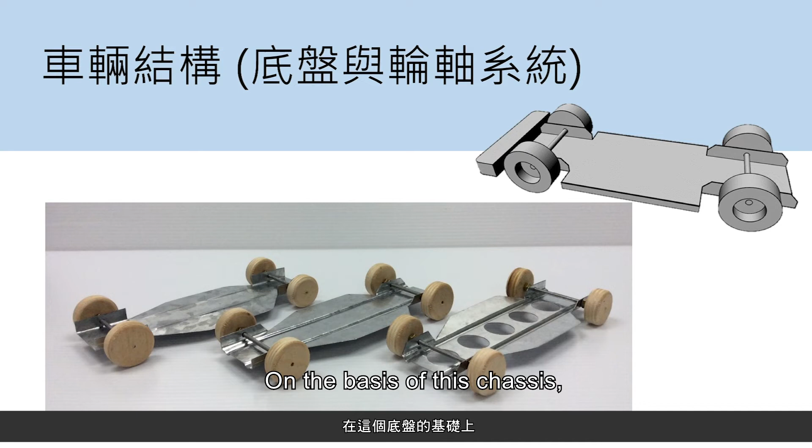Vehicle structure, chassis and axle system. In this unit, students will first design and build a vehicle chassis for an experimental test. On the basis of this chassis, we can continue to develop the shape of the car body and improve our high-pressure air-speed car in terms of performance refinement. All optimization experiments can achieve our engineering design optimization goal through the modification and advancement of the chassis system.

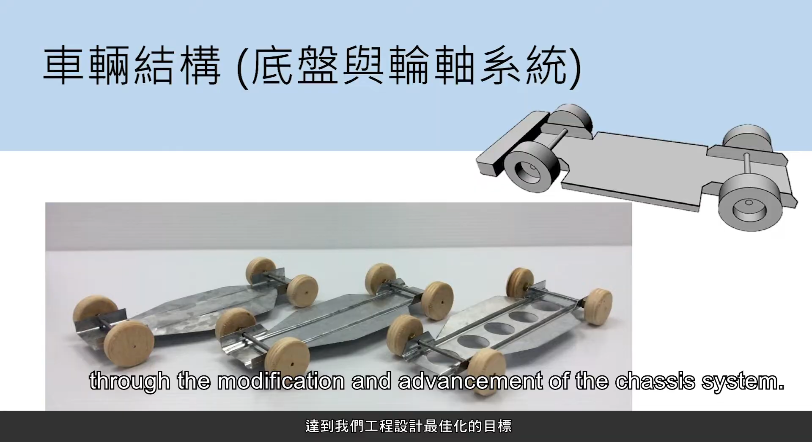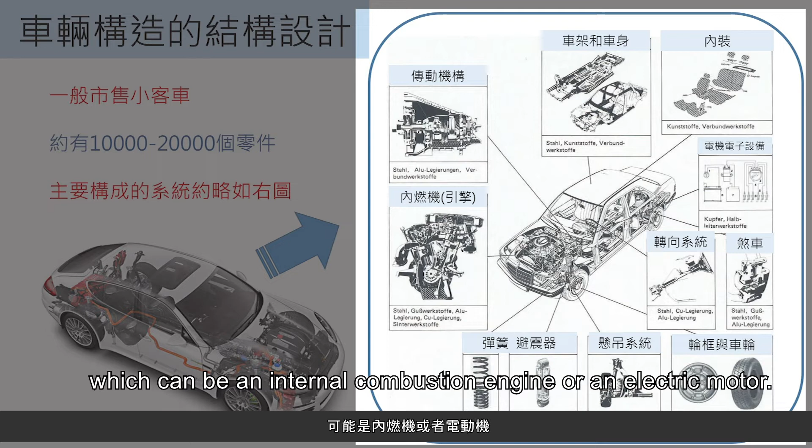The car is a very complex machine. It includes many systems, such as the transmission mechanism, the frame and body, the interior, the steering, the brakes, the wheels, the suspension, the spring, and shock absorbers, as well as the power system, which can be an internal combustion engine or an electric motor. There are many parts combined in these systems, so there are about 10,000 to 20,000 parts in a regular passenger car. For the assembly of these parts, the structural design must be very strong.

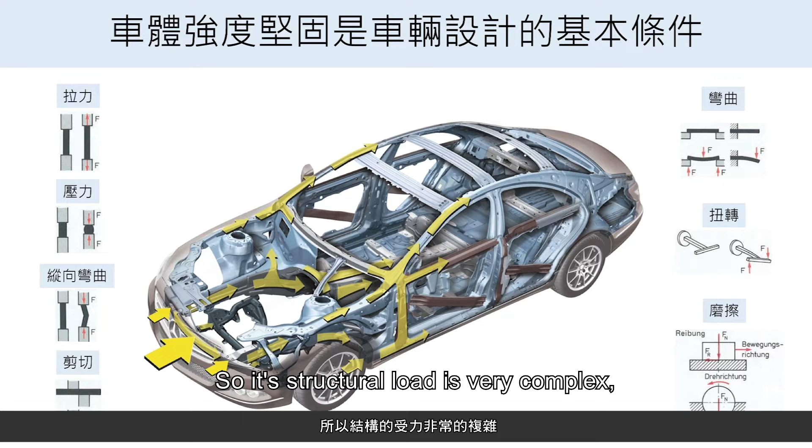So that each system can work properly, it is a basic requirement of vehicle design. The sturdiness and safety of the car body's structural strength is a basic requirement for vehicle design. Due to its structural complexity and the severity and changeability of the driving conditions, its structural load is very complex, which includes pulling force, compression force, longitudinal bending, shear force, bending force, torsion, and friction between parts. These forces make the structure of the car body a complex and huge project.

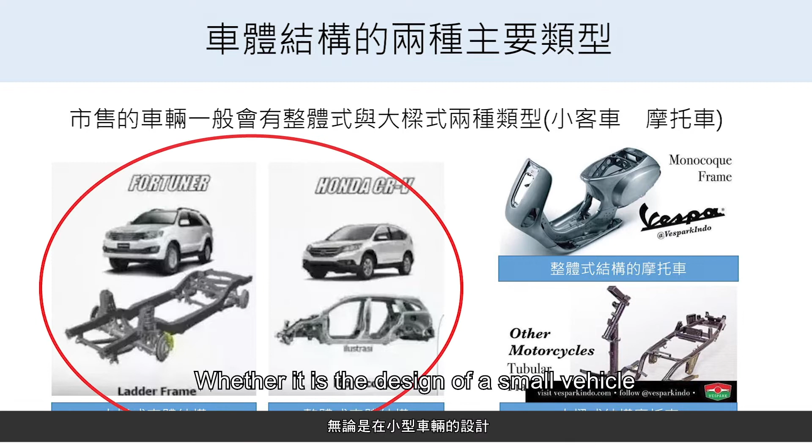There are two main types of body structures. One is the ladder frame type, and the other is the monocoque frame structure. Whether it is the design of a small vehicle or a motorcycle, these are the two main types of structure. Generally speaking, the monocoque frame design has the following three main advantages. 1. Larger passenger space. 2. A more comfortable ride due to shock absorption. And 3. A more comprehensive protection for passengers. Therefore, presently most cars that are sold use the monocoque frame as the main structural design method.

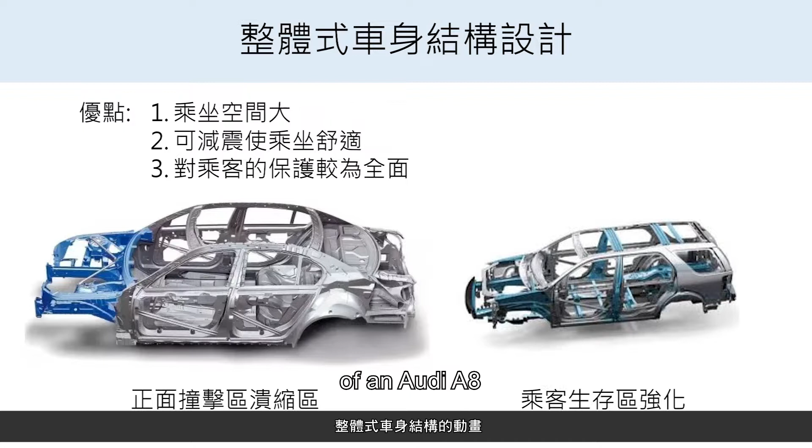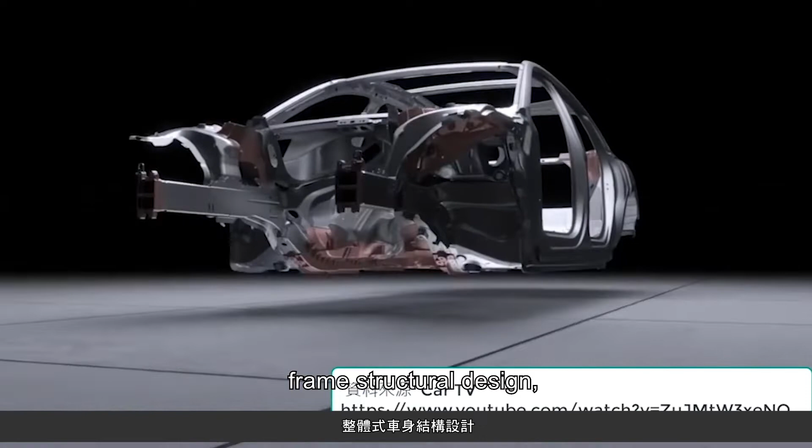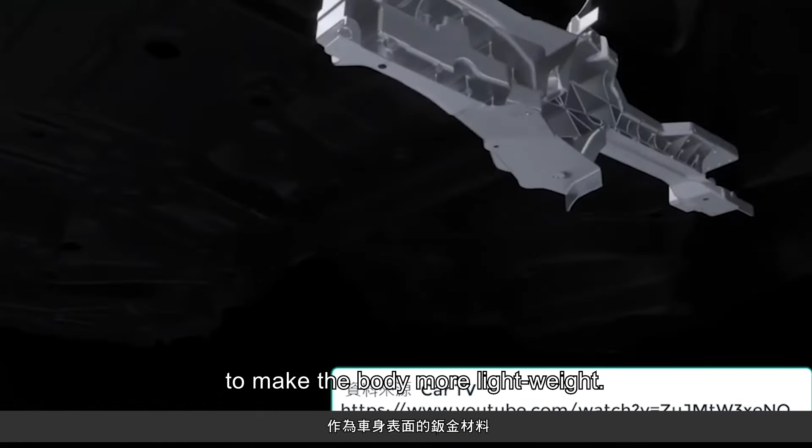Let's have a look at the animation of the monocoque frame of an Audi A8 to understand the design of the monocoque frame body structure. The monocoque frame body structure is composed of many steel plates or casting parts. The Audi A8 design that we see here is a very original monocoque frame structural design, which includes the aluminum alloy parts shown in red, high-strength steel plates, and aluminum material used as sheet metal for the car body surface to make the body more light-weighted. These aluminum connecting joint parts are designed with many ribs to increase the structural strength while also decreasing its weight.

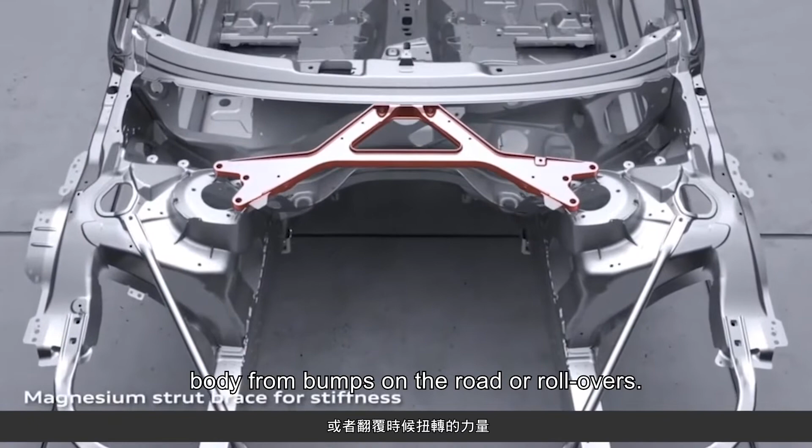The parts of the body structure that require strength are forged from high-strength steel, which can withstand forces such as front impact collisions, and torsion suffered by the vehicle body from bumps on the road or rollovers. When the vehicle is subjected to a side impact, the overall frame is used as a force dispersion structure, which is the strength advantage of the monocoque frame body structure. It can protect the safety of its occupants in the passenger's area to the maximum extent.

These complex and diverse materials and structural designs are a complete protection mechanism for the body structure, making the vehicle structure safer and the passenger space more comfortable. This is the biggest advantage of the monocoque frame design.

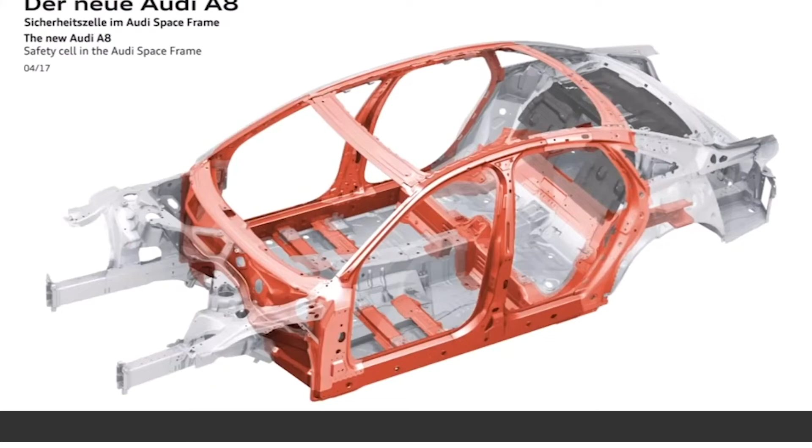The car ladder frame body structure design mainly has the following two advantages. 1. Better load capacity, and 2. More flexible design space. Therefore, we can use the same chassis design and make different body structures. Next, we are also going to watch some videos regarding the ladder frame design structure and understand what kind of body structure design it is.

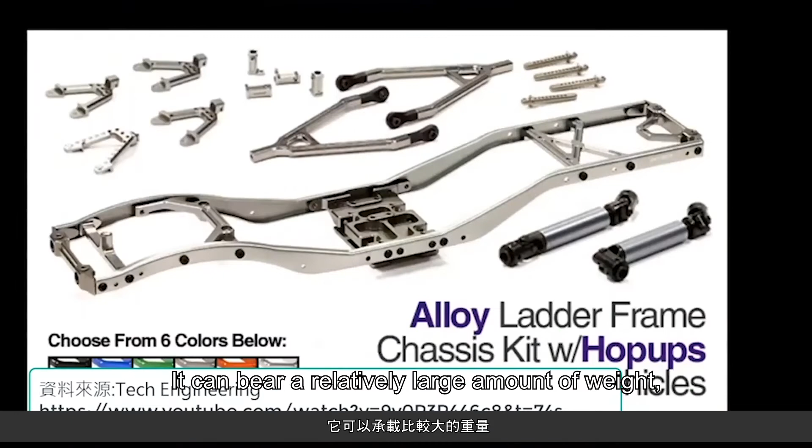What you see now is the ladder frame of the structure. The main structure of the ladder frame is made by the welding of different metal bars. It can bear a relatively large amount of weight, so this type of structural design is generally used in trucks, vans, or off-road vehicles. The design of the car body structure is closely related to the engineering materials used. The ability of diverse design application from the in-depth high school curriculum material is an extension of our learning content.

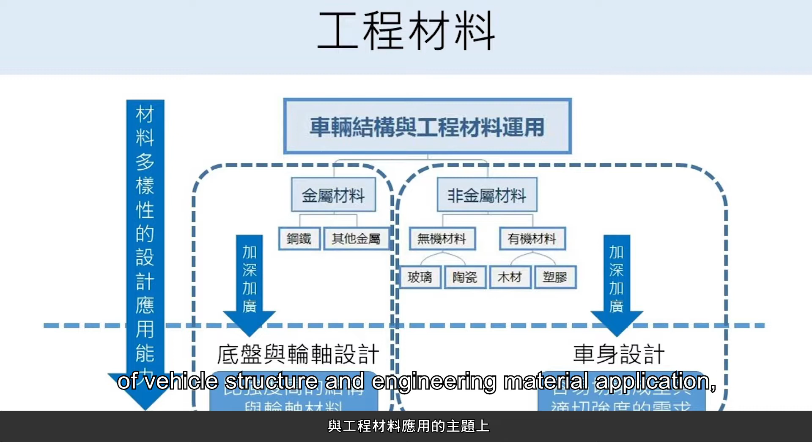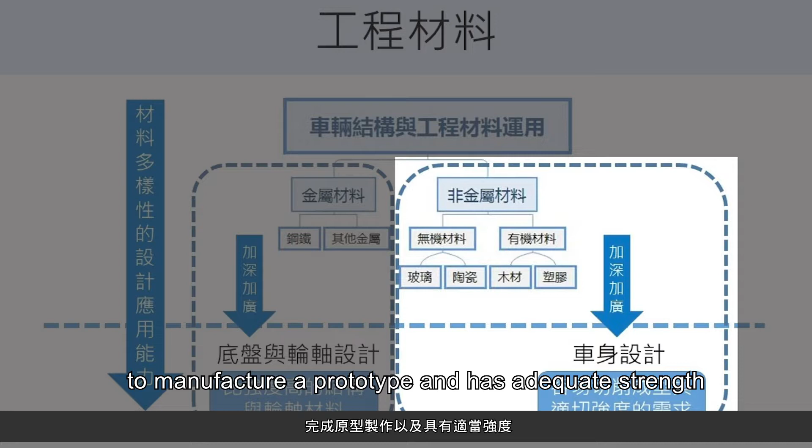Therefore, for the topic of vehicle structure and engineering material application, we use structural design materials with higher strength in the design of our vehicles, chassis, and axle systems. The material processing part includes the application of many types of metals and processing techniques. For body styling, we use materials that are easy to cut and shape to manufacture a prototype and have adequate strength to perform all test conditions. Non-metallic materials, such as wood or foamed plastic, are most likely to be used as material for body styling.

Here is a conceptual knowledge of the application of materials in structural design. Specific strength of a material. The specific strength of a material is the strength of the material divided by its density. Specific strength is a very important concept in the design of traffic and transportation vehicles. Under this concept, we can use materials with higher strength and lighter weight to achieve higher structural strength in terms of the design of means of transportation and better results in terms of energy efficiency.

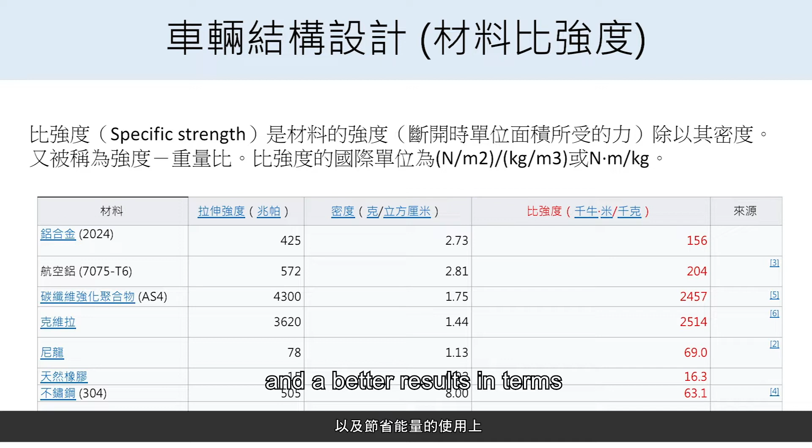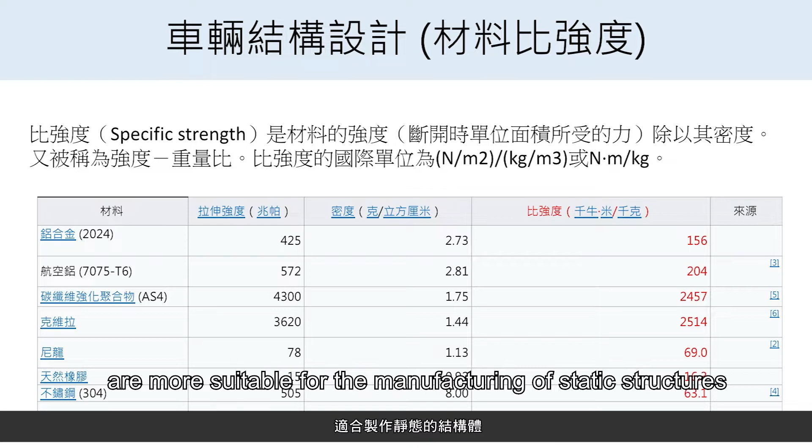In the following table, we can see that some commonly used materials with high specific strength, such as composite materials, are suitable for the manufacture of traffic and transportation vehicles. Materials with a low specific strength, while also having a high structural strength, are more suitable for the manufacturing of static structures, such as civil structures or buildings like houses.

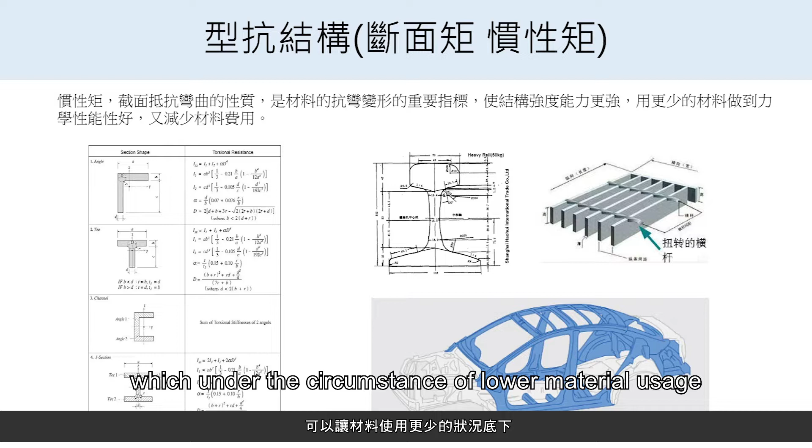In structural design, form-resistant structure is also a very important concept. The form-resistant structure uses the design concept of higher sectional moment and moment of inertia, which under the circumstance of lower material usage can achieve better mechanical and structural characteristics, reduce the use of materials, and improve the strength of the structure.

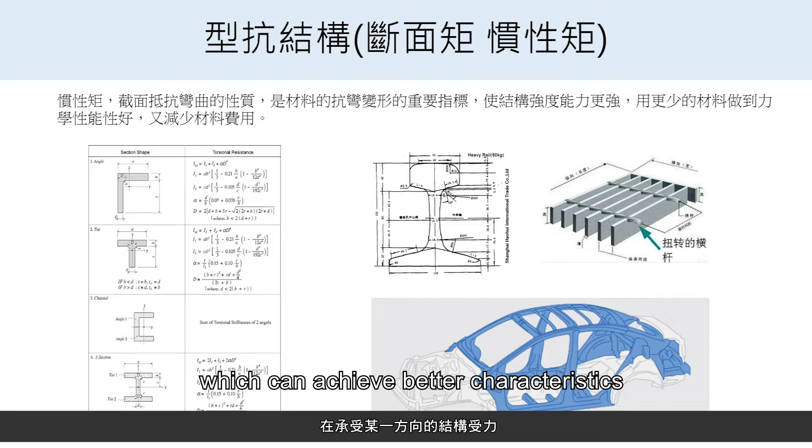For example, in many structures, we will use special rectangular or I-shaped cross-section materials, which can achieve better characteristics when bearing structural forces in a certain direction, or bend the steel plates into many irregular shapes, which can make the whole structure stronger when combined together, which is also one of the reasons why the monocoque frame structure is strong and durable.

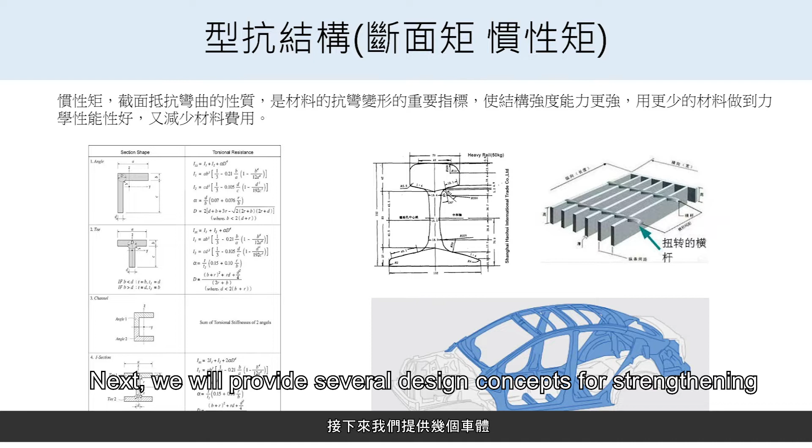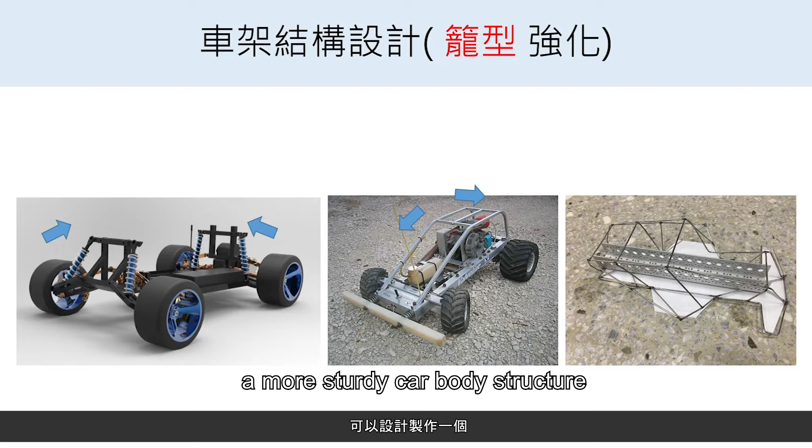Next, we will provide several design concepts for strengthening the structure of the car body and provide you with a reference for the structure design of your compressed air racing car project. The next topic is the design and manufacturing methods for reinforcing the vehicle's body structure. First of all, what we see here is the cage structure reinforcement method. It adds an outer frame welded into the shape of a cage onto the original chassis design to strengthen it. With this method, a more sturdy car body structure can be designed and manufactured.

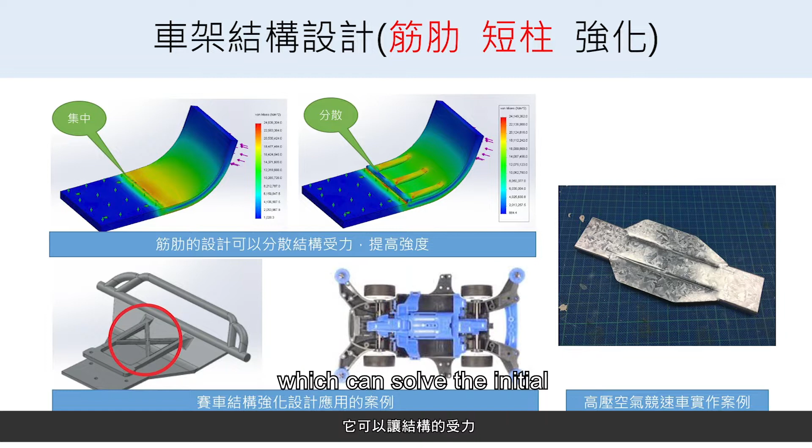The second method can be often seen in many car body structures. For parts of the structure that endure large forces, we design ribs and stubs, which can solve the initial problem of force concentration by dispersing the structural force at the location of the ribs, so the overall strength can be improved. For example, on the bottom right is the chassis design of our compressed air racing car. We roll-pressed 2 ribs in the middle of the chassis, which can reinforce the original strength of the metal sheet to make the structure more sturdy and durable.

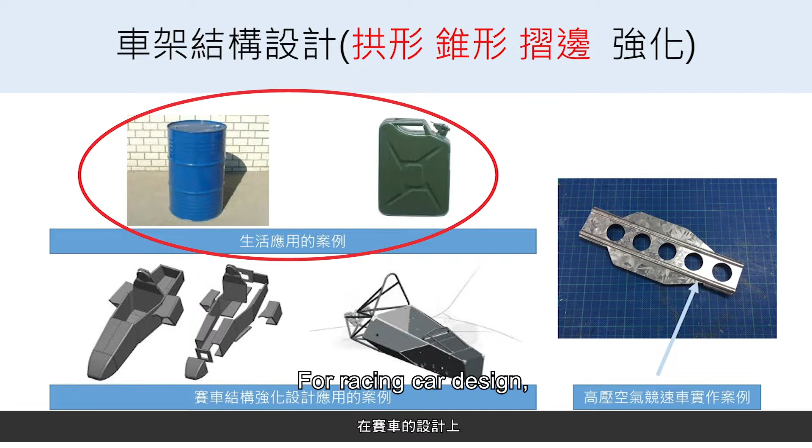The third method of structural design reinforcement is the use of sheet plates, joining them together like jigsaw puzzles to make the whole structure more sturdy. The fourth method of structural reinforcement design of the car body is the use of arched, tapered, or hemmed shapes, which can be often seen in the design of containers, which use bending techniques to increase the container's strength. For racing car design, for example, the use of arch shapes on the front of the F1 racing car can reinforce the passenger area's overall structural strength.

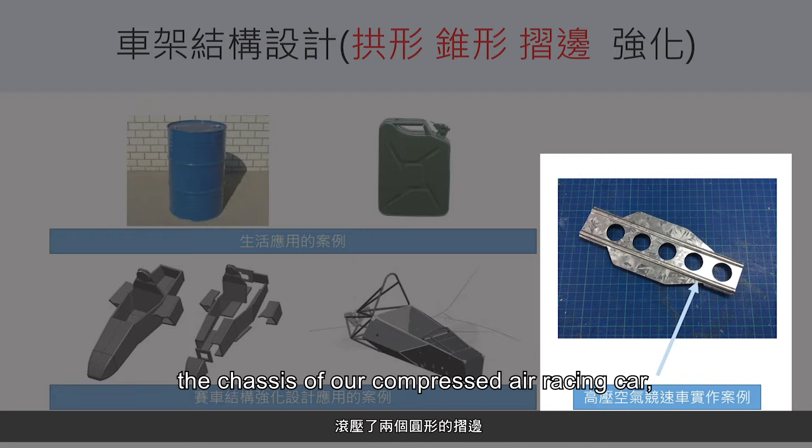Or the use of this kind of hemming to improve the structural strength of the body to keep the racing driver safe in the passenger area. For example, as shown in the lower right figure, two circular folded edges are rolled at the middle of the steel sheets of the chassis of our compressed air racing car. These arc-shaped edges can make the overall structure of the vehicle body more sturdy. Therefore, we can punch some holes in the middle. Not only does it improve its strength, but it also reduces the weight.

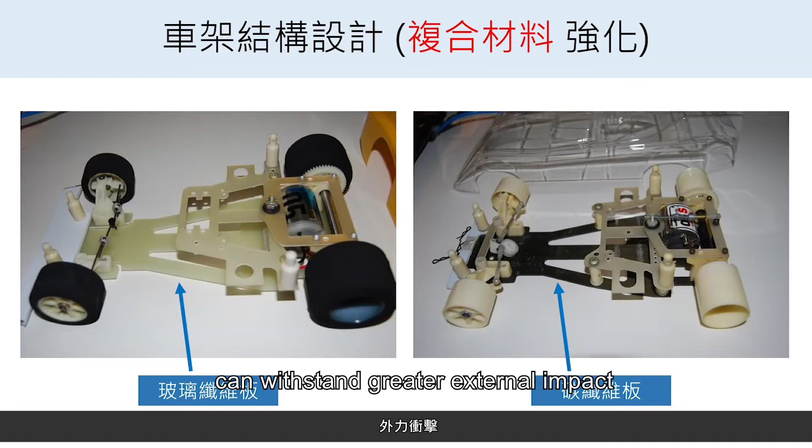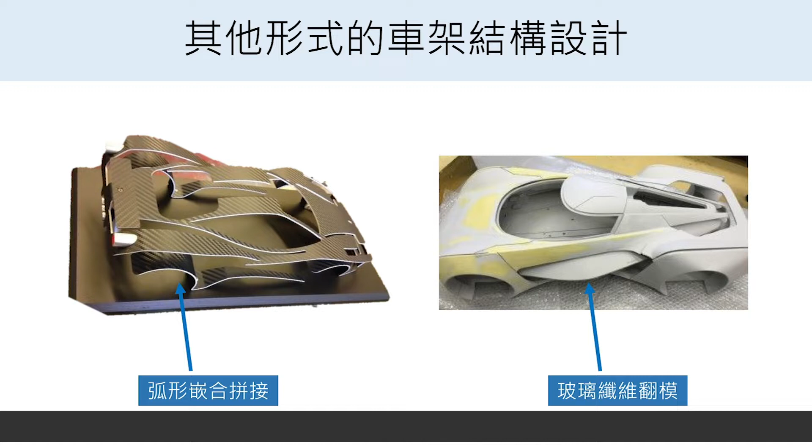The fifth method to strengthen the car body structure is to use composite materials. Composite materials are made by combining two materials with different physical properties. They can complement each other and bring out the better physical properties of the materials, such as the commonly used composite glass fiber board or carbon fiber board. Besides the high-strength physical properties, they have more toughness and can withstand greater external impact and achieve the goal of structural strengthening.

Two other structural design forms are provided here, which can improve the overall structural strength. For example, the body structure is clamped together piece by piece in an arc-shaped manner. This kind of structure can withstand greater external force and improve the overall structural strength. Another mode of structural design strengthening is to use the method of glass fiber molding, which is similar to the concept of monocoque structure. The components are integrated into a one-piece structure that share the bearing force with each other, so the overall structural strength is enhanced.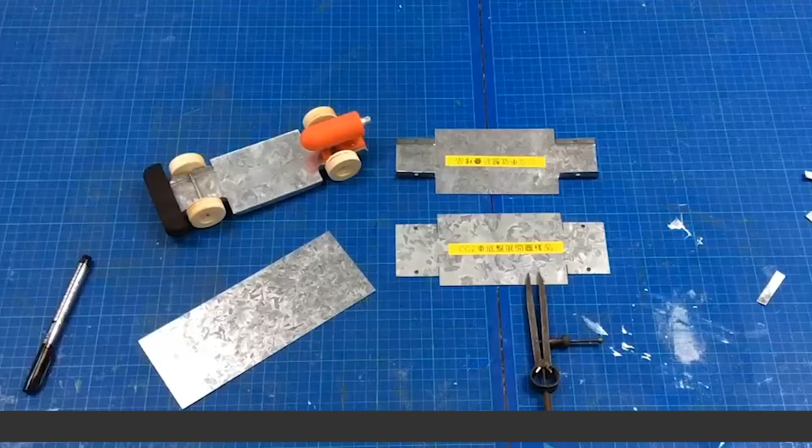Making the chassis. Contour width of 10 mm. Wheel diameter of 40 mm. Use a divider to measure the dimensions we need. The technique of drawing a line on the steel sheet: we can use the divider guided by the edge of the galvanized steel sheet. We draw the width that needs to be trimmed off for the wheels. The distance of the lines drawn is equal every time.

Next, we measure the diameter needed for the wheels on either side. Here, we adjust the divider to 40 mm long. The divider used here has a quick adjustment mechanism design. Now we rotate the steel sheet 90 degrees and draw the 40 mm space needed for the width of the wheels.

Because the steel sheet has a reflective surface, we use a marker to mark the point of intersection. After that, we also use the marker to draw the lines that need to be cut more clearly, so that we can see with ease the position of the lines when cutting.

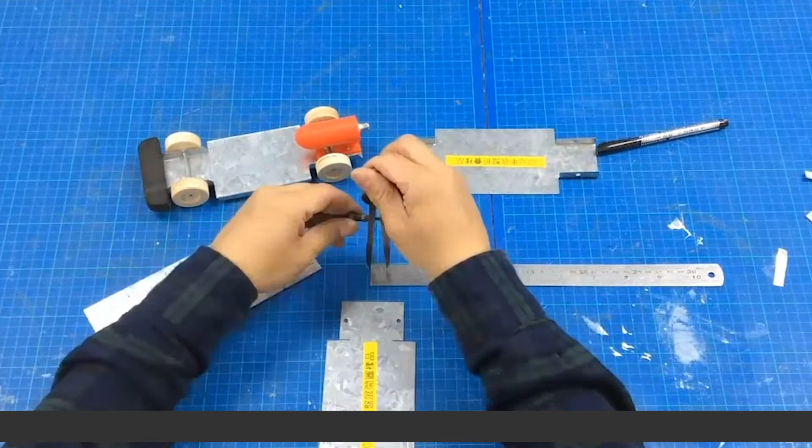Next, we measure the location of the holes needed for the axles. Here we adjust the divider to 15 mm. In the same manner, we use the divider guided by the edge of the steel sheet to draw the 15 mm distance required for the drilling of the holes.

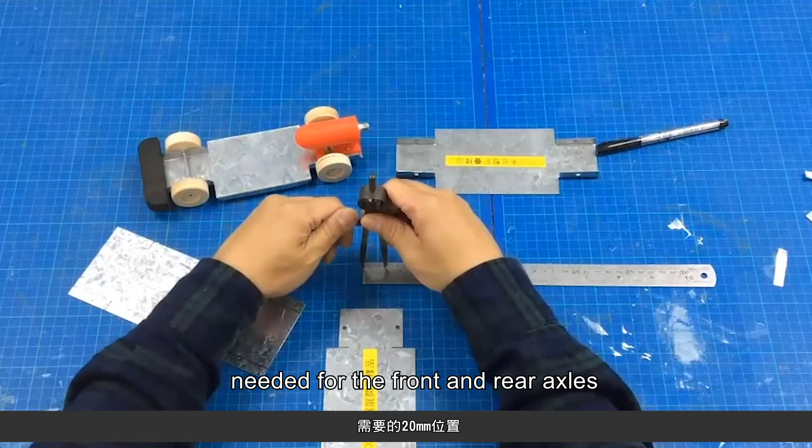Next, we measure the 20 mm distance needed for the front and rear axles and mark the position of the rear axle and the position of the front axle on the steel sheet. We also use a marker to mark the location of the drilling holes.

Finally, we draw the 20 mm distance needed for the cutting line for the hemming on the steel sheet. In the same manner, we use a marker to draw the cutting line clearly.

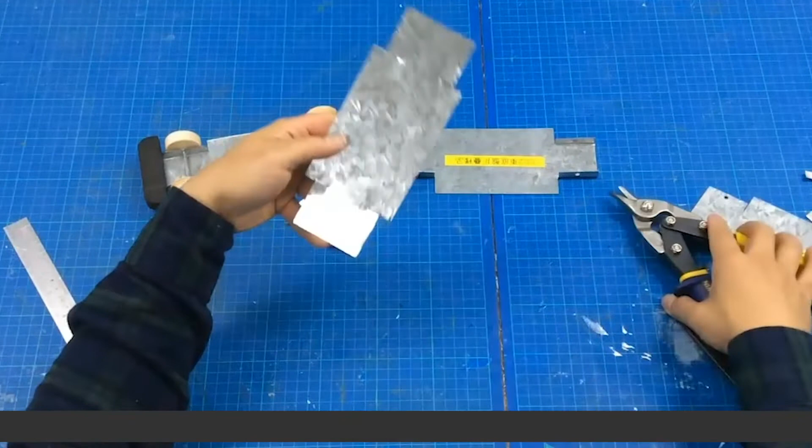Before starting the cutting, we check that all the steel sheet's expanded views are correct. Then, we use aviation scissors to cut out the space required for the tires. Use a rubber hammer to flatten the warped parts.

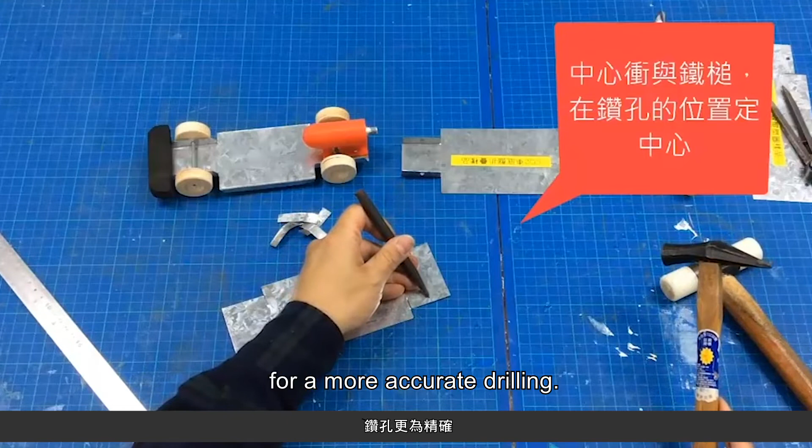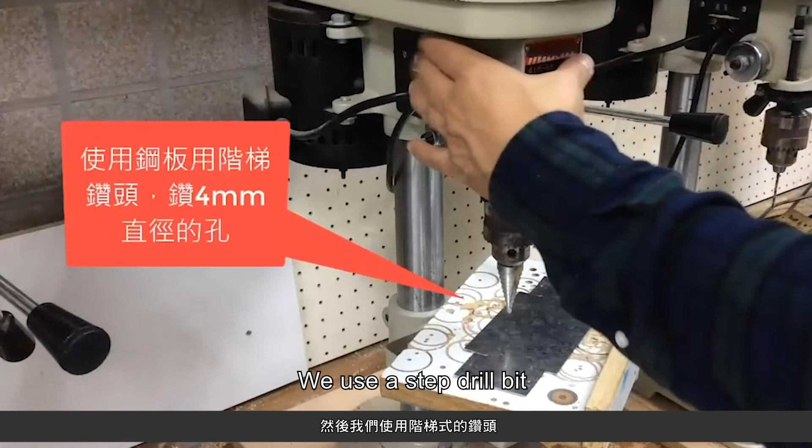We also use a hammer and a center punch to mark the position of the holes. This positioning method can guide the drill for more accurate drilling. We use a step drill bit to drill 4 mm holes. To make the drilling operation safer, we use a wooden cushion block with a guard to prevent the material from being spun around by the drill, which can be dangerous.

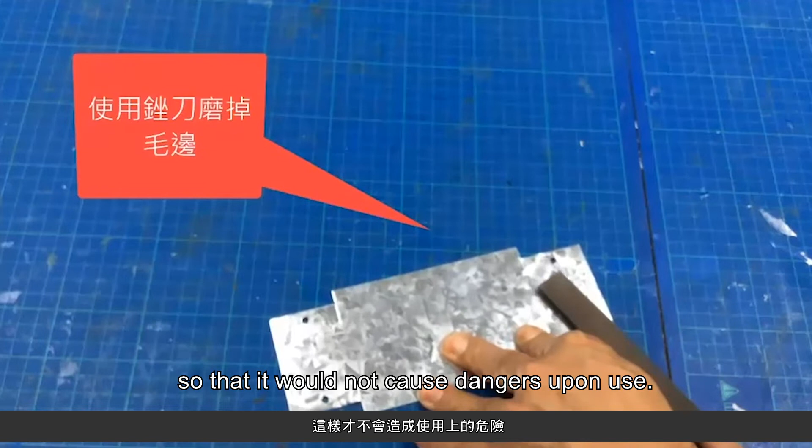After drilling, the backside of the plate often has the issue of protruding burrs. We use a file to remove the burr so that it would not cause dangers upon use. Let's just touch it with our fingers and check that it doesn't cut.

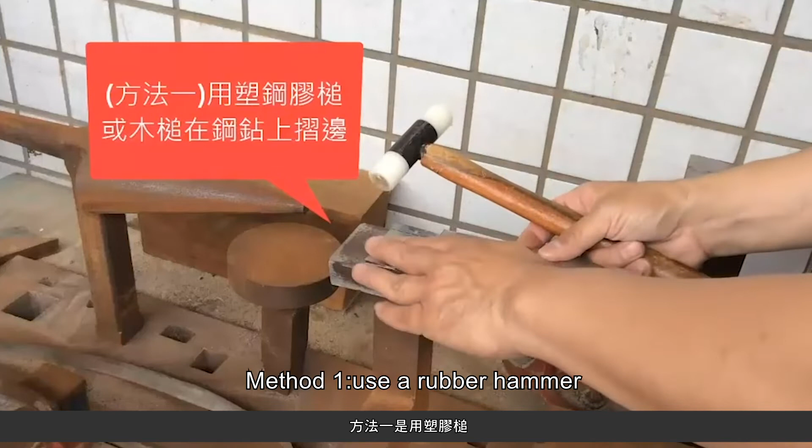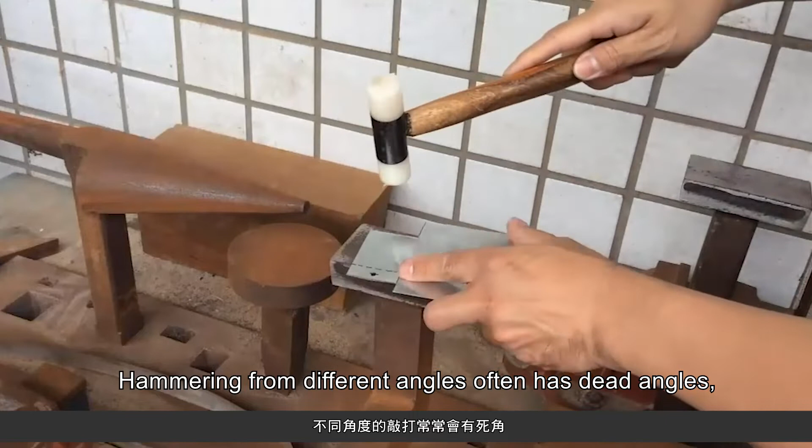Next, we will demonstrate 2 ways to hem the edge. Method 1: use a rubber hammer to hit the plate on the steel anvil at its edges. Hammer the edge flat first, then slowly in a tilted position, and finally turn it to 90 degrees and hit it from the side. Hammering from different angles often has dead angles, so we often need to change to different hitting points. Everyone should be proficient in this way of hemming the edges.

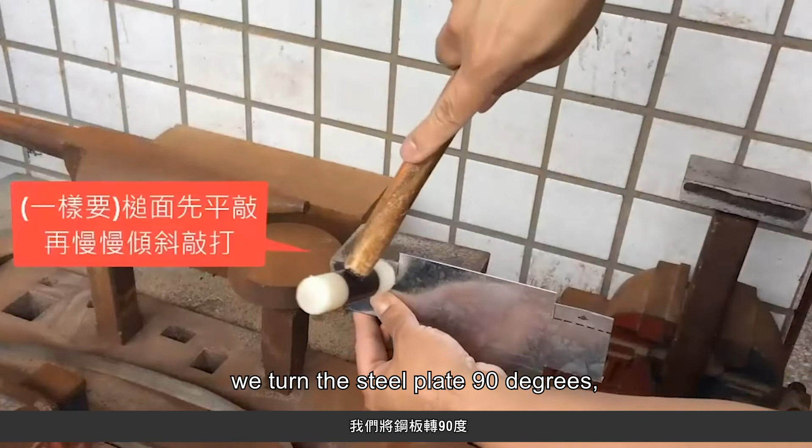At this angle, we turn the steel plate 90 degrees, and the side of the steel anvil is the front of the steel plate. Slowly tilting the hammering, beat until you hit the front of the steel anvil at 90 degrees. Finally, we check that every hem is 90 degrees. This is the hemming method using a steel anvil for hammering.

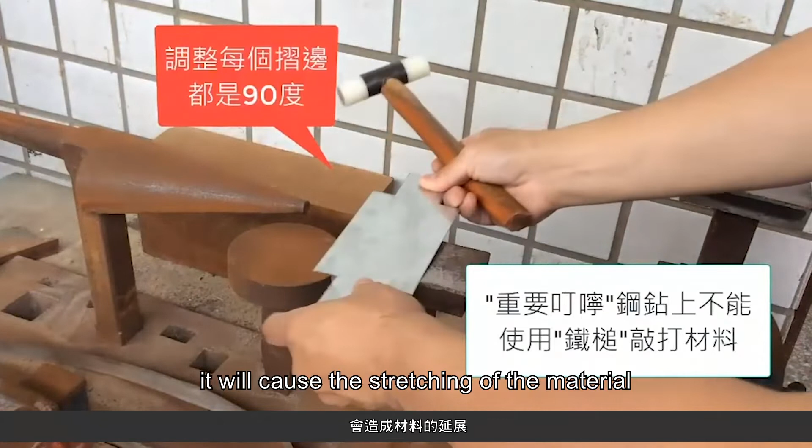Finally, the teacher wants to remind you all that we must use the PVC hammer or wooden hammer on the steel anvil. If we use an iron hammer, it will cause the stretching of the material and cause destructive damage to our material.

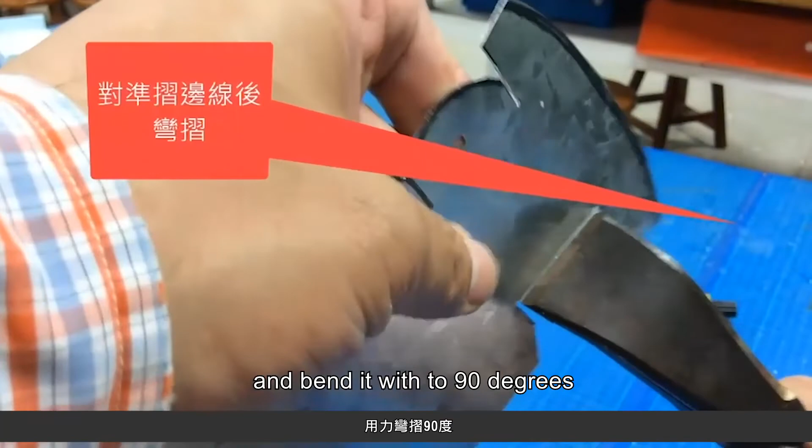In the second method of hemming, we use hemming pliers to clamp our material, aligning to our hemming line mark, and bend it by 90 degrees, which can also achieve the hemming effect of the metal sheet.

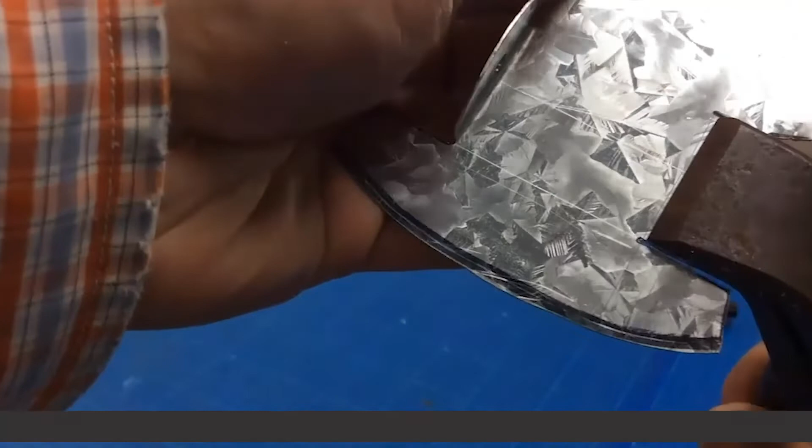After bending the chassis of the vehicle into shape, many corners may have sharp burrs, which need to be removed with a file to avoid injury. Finally, we also use our finger to touch and see if there's any place that still cuts and needs more filing.

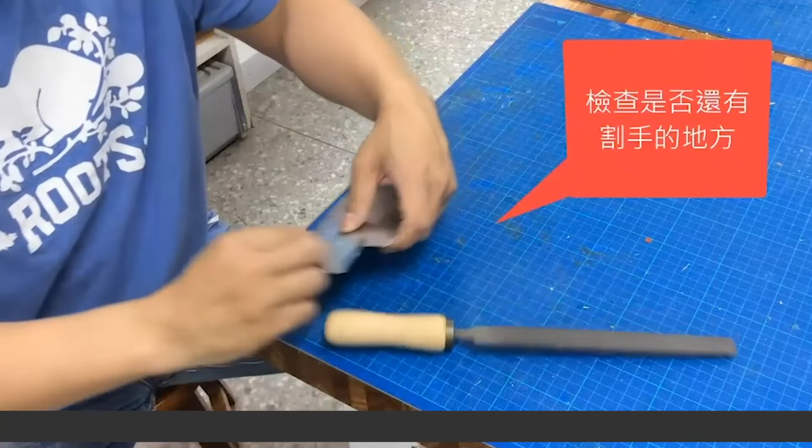Hello everyone. In this unit, we will arrange a practical activity for the production of the vehicle axle system and chassis. This chassis will be used for future testing on our compressed air racing car. The design of the chassis system has three characteristics. 1. A ladder frame structural design that can undergo repeated high-intensity testing. 2. No additional bearing system is needed, which can reduce the material cost of our practical activity. 3. A flexible body design with a chassis structure that can combine with different car body designs.

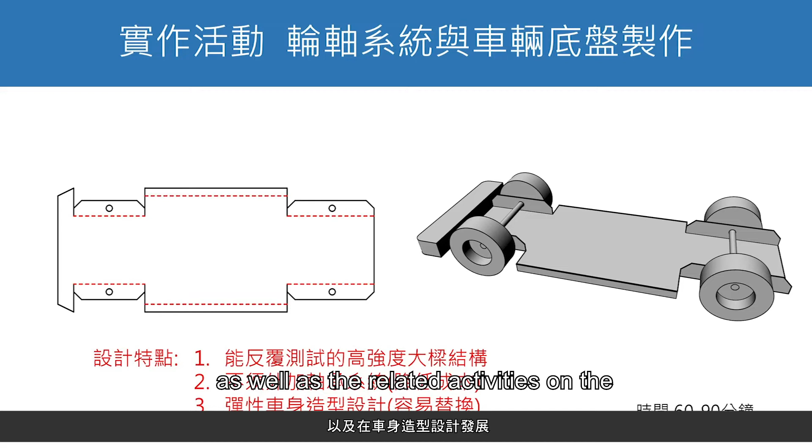We plan on spending 60 to 90 minutes on the practical event. Once the chassis is finished, we can perform the rolling resistance experiments of the vehicle as well as the related activities on the development of the vehicle's body styling design.

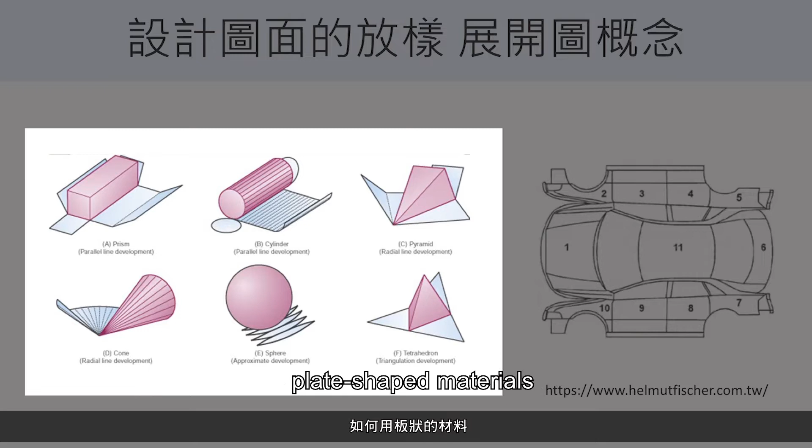For this topic, we will use the net drawings of engineering design sketches to let students learn how to use plate-shaped materials, such as iron plate, aluminum plate, plastic, or paper sheets, to make the planar unfolded drawing of three-dimensional figures. Such practical design drawing techniques are also very important operational skills. For this practical activity, measurement and sheet metal forming tools will be used.

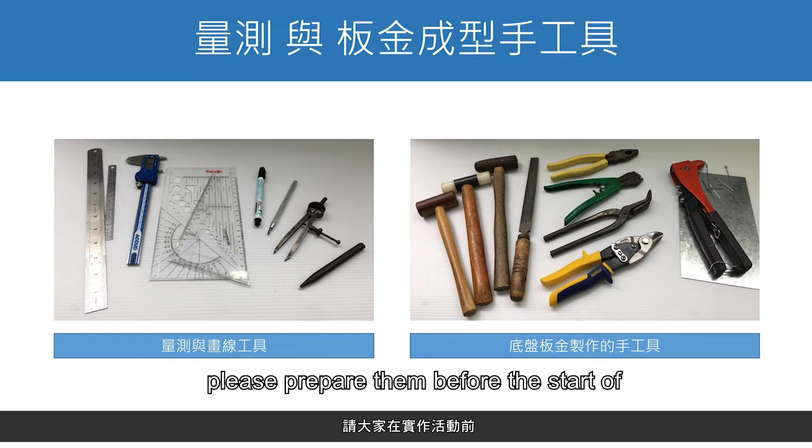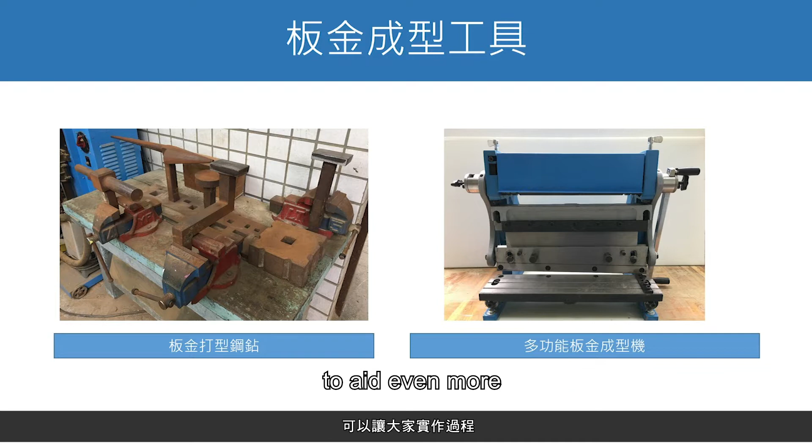These tools are very easy to obtain. Please prepare them before the start of the practical activity to facilitate the subsequent activities and production projects. Other tools related to sheet metal forming are also briefly introduced here. For the practical activity, we can use regular hand tools, or if the school has this kind of manufacturing equipment, it can aid even more in the process of this practical activity.

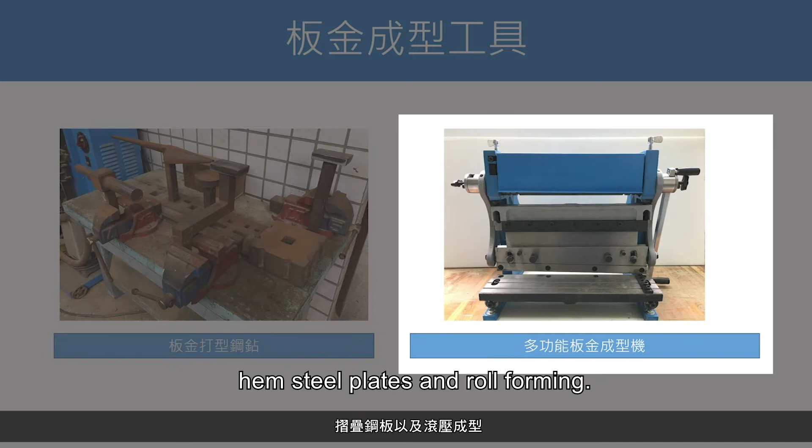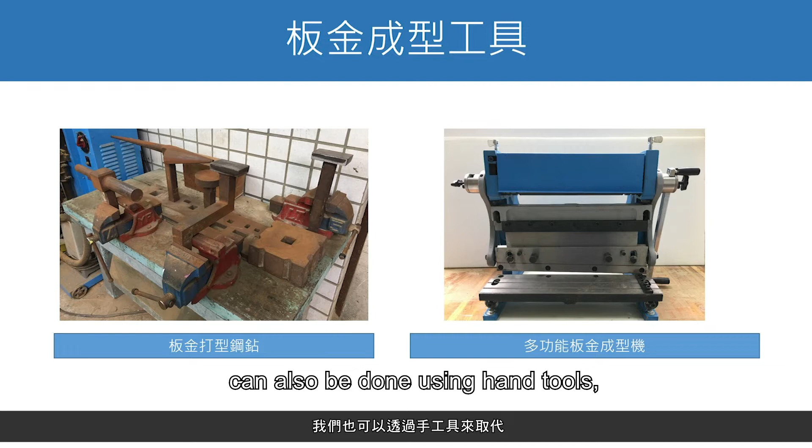The photo on the left is an anvil used for traditional sheet metal forming. If the school does not have this kind of equipment, steel bars or iron plates can also be fixed on the edge of the desk and used for sheet metal forming. The photo on the right is a multifunctional sheet metal forming machine, which can cut steel plates, hem steel plates, and roll form. If the school has this kind of equipment, the production of the chassis can be easier and more convenient. Most of the work can also be done using hand tools. We do not necessarily need these machines.

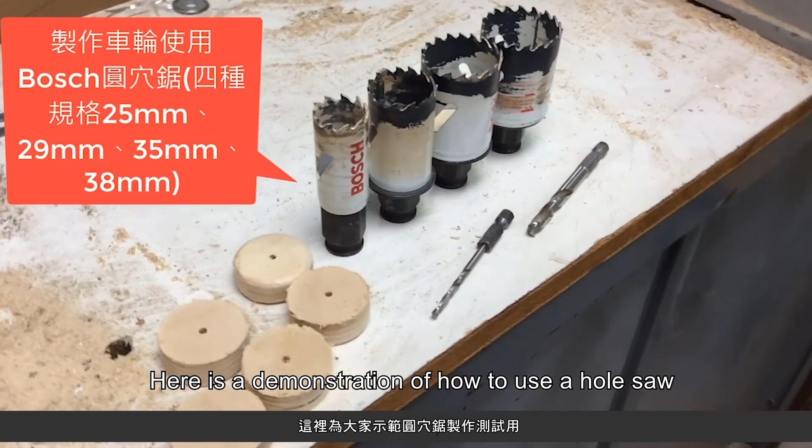In addition to the hand tools and equipment needed for sheet metal forming, we can use a hole saw to quickly turn our material into circles. For subsequent experimental testing, in the following video, the teacher will actually make this standard chassis that you can see in this picture. Here is a demonstration of how to use a hole saw to manufacture tires for testing. For the material of the tire, we will use 20mm and 15mm thick birch plywood, cut into rectangles, which is convenient for the safety of the students. Replace it with a 3mm diameter drill bit used for the fixture of the tire axle.

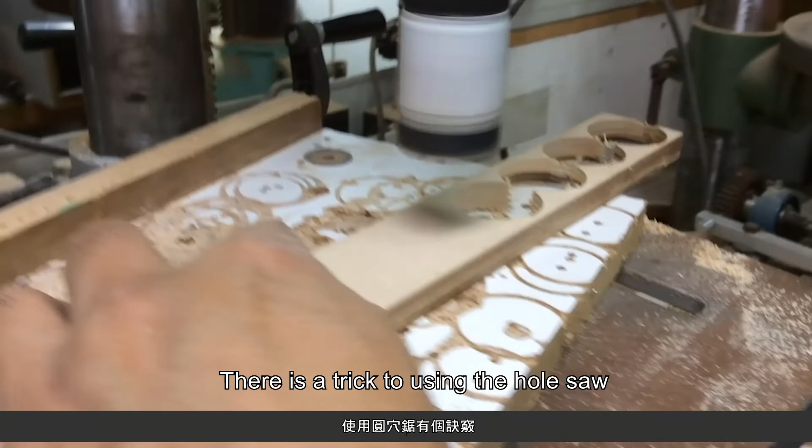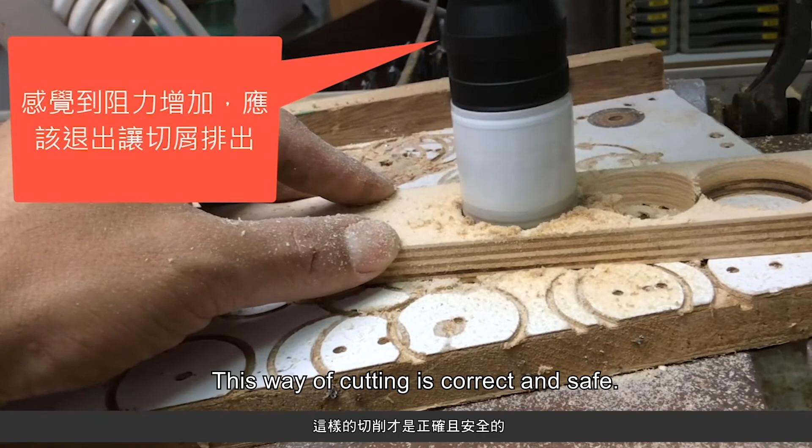There is a trick to using the hole saw. We can expose the edge of the blade to the outer edge of the material so that the swarf can be removed through the crevice. The cutting speed can be faster. When we feel that the drill has more resistance, we should pull the drill back up to allow the swarf to be removed. This way of cutting is correct and safe. Remove the hole saw. Use a round iron rod to push out the wheel stuck inside.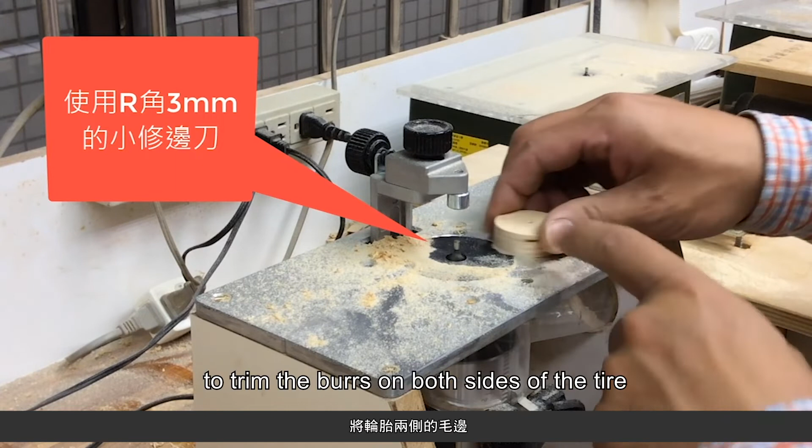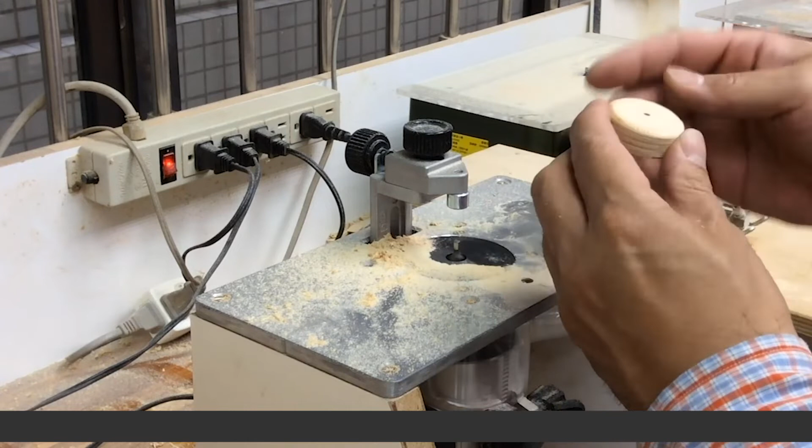Next, we use the router to trim the burrs on both sides of the tire into a circular tire with a 3mm fillet. Hold the material with the index finger of the left hand and rotate the material with the right hand in the opposite spinning direction of the tool to steadily cut out the fillet that we need. Finally, we finished making the wheels used for testing.

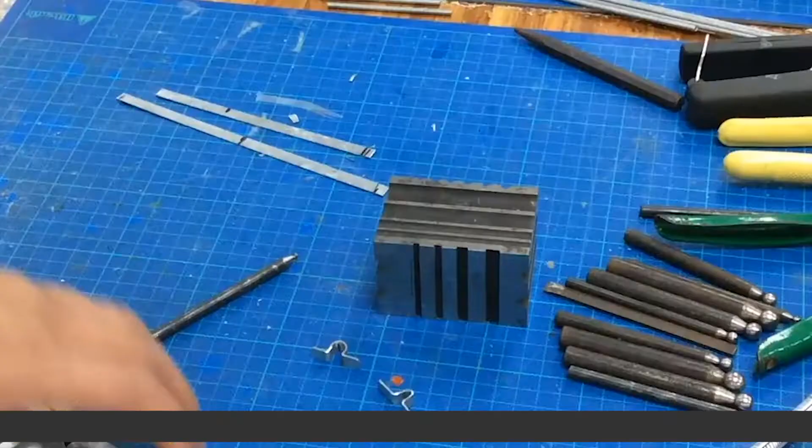Here is a demonstration of the production method of the guide sheet used in the test of the compressed air racing car. Method 1: use a round anvil and a spherical punch to make the guide sheet. Here we use a 1mm thick galvanized steel plate. We measure 40mm material length and cut it out. File the cross-section of the plate to prevent sharp edges on the surface of the material.

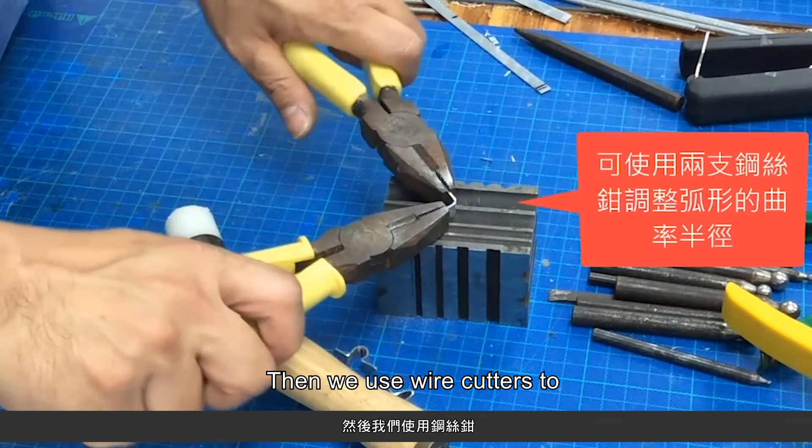We use a protractor to align the material 90 degrees to the axis of the anvil. Next, place the sphere punch in the middle of the groove and hit it with a PVC hammer to make the material into a circular arc. Then we use wire cutters to adjust the curvature of our arc and make both sides symmetrical. Then use the sphere punch to shape it to make the shape more consistent and symmetrical.

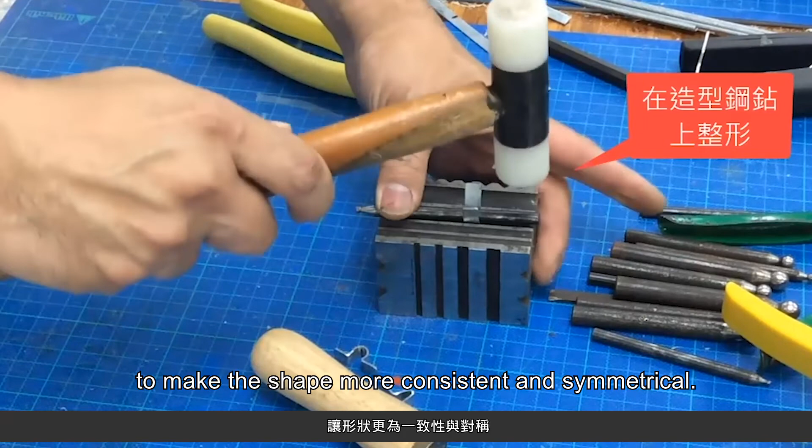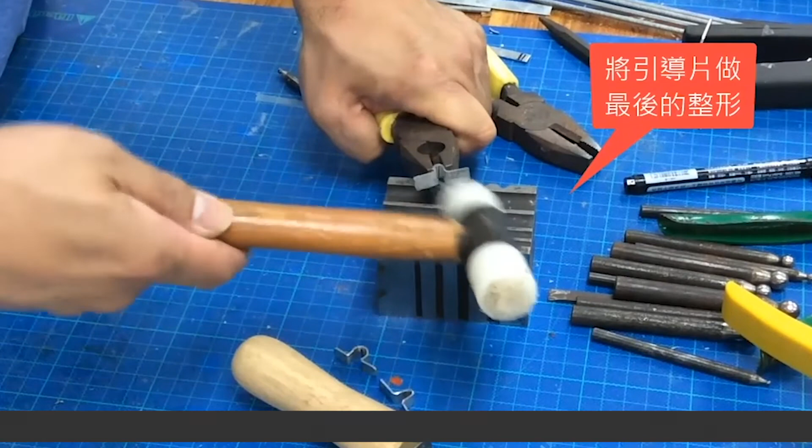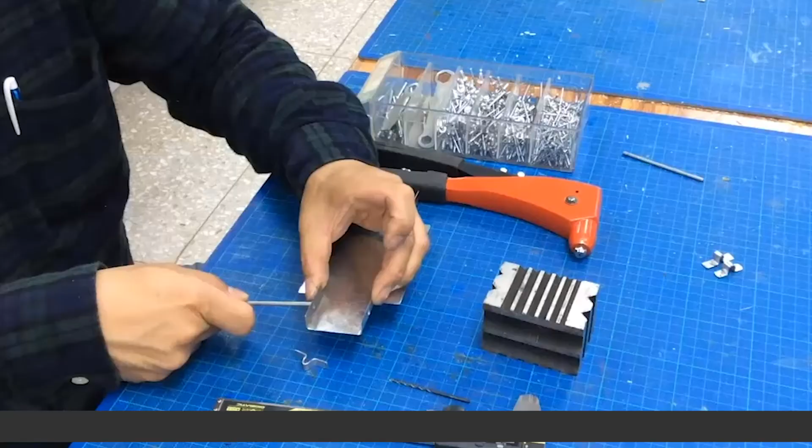Use a marker, measure the left and right sides and mark the symmetric point of hemming. Use wire cutters to bend both sides of the steel plate by 90 degrees so that it can be fixed onto the chassis later. Finally, we use a PVC hammer to adjust the guide plate into its final shape. Let's first install the axles of the chassis and see where the guide plate should be fixed to avoid its obstruction with the axles.

Mark the positions of the drill holes with a marker. Here we use a divider to mark the location where we want to drill the hole on the chassis. The left and right sides should have the same depth and be symmetric. Use the center punch to position the drilling location. Adjust the height of the drilling machine and use a 2.5mm drill head to drill the rivet holes.

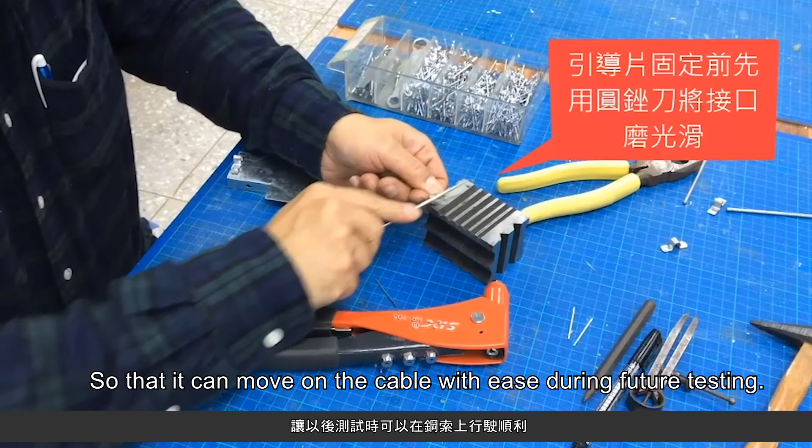The size of the guide plate is relatively small, so it is safer for us to use wire cutters to hold it before drilling the holes. We use a round file to smoothen the edges of the guide plate so that it can move on the cable with ease during future testing. Finally, we insert the rivets and the chassis plate.

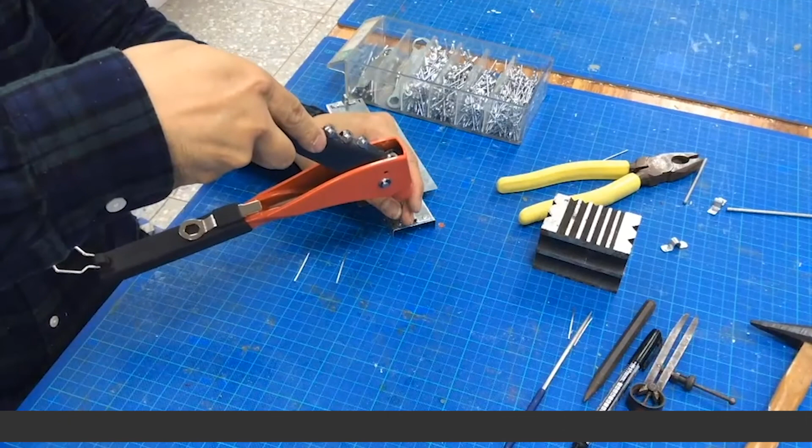After the two plates are buckled together, use the rivet gun to pull out the iron rod in the middle. The final result is that the rivet will clamp the two materials together. This is the first method, the method of using rivets to fix the guide plate onto the chassis.

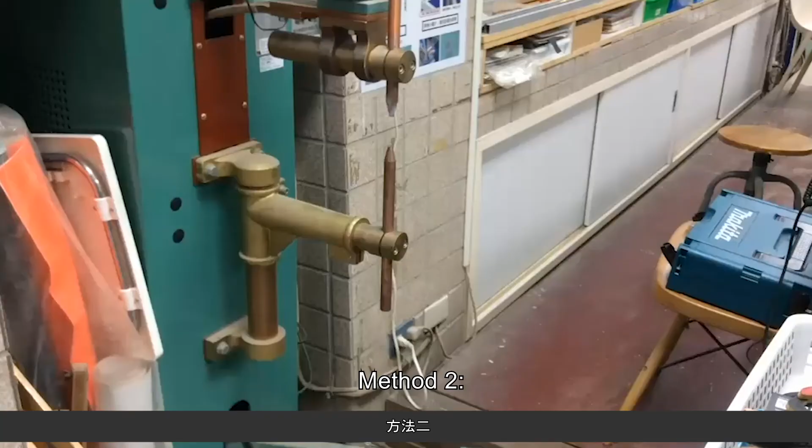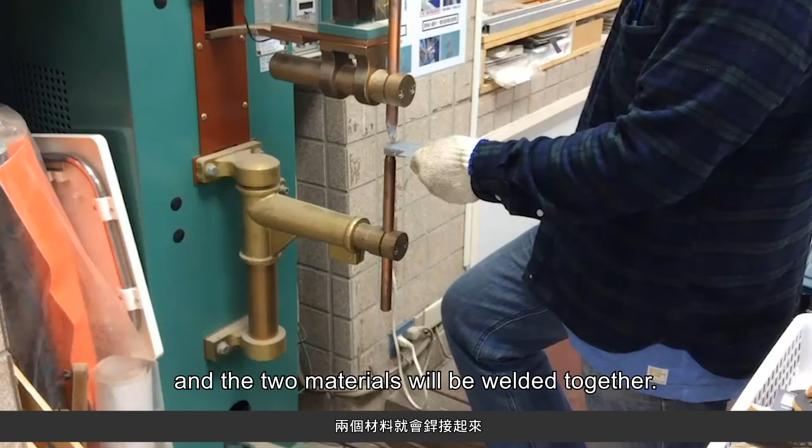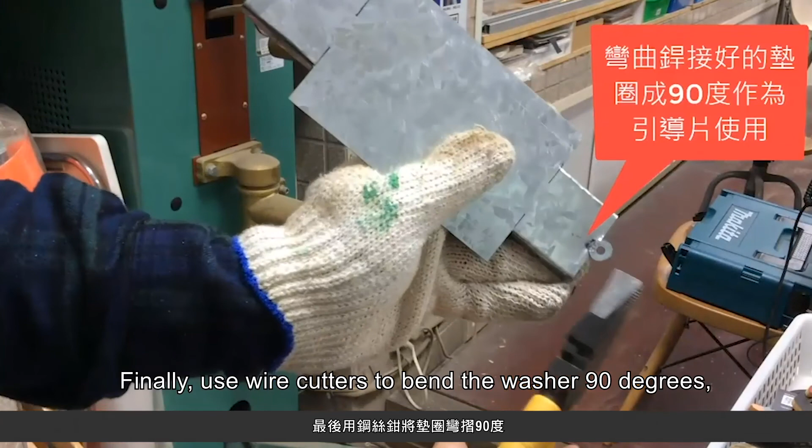Method 2: use a resistance spot welding machine and use a washer as conductor. Wear gloves to protect our hands when operating. Put the washer on the chassis plate. Step on the switch of the spot welding machine to let the current pass, and the two materials will be welded together. This is the method of using the resistance spot welding machine to weld the washer onto the chassis to make a guide plate. Finally, use the wire cutters to bend the washer 90 degrees, and then it can be used as a guide plate.